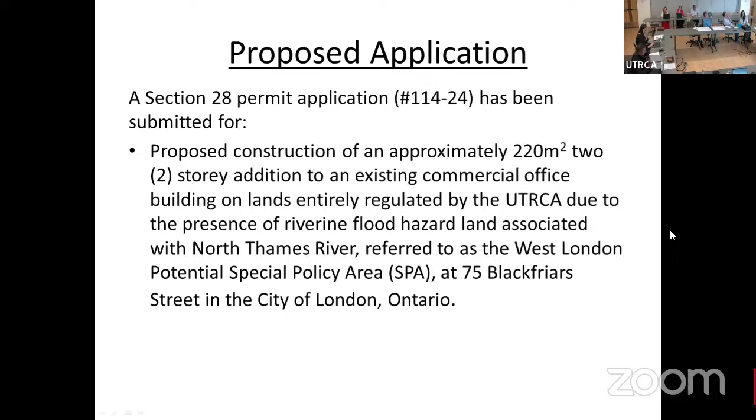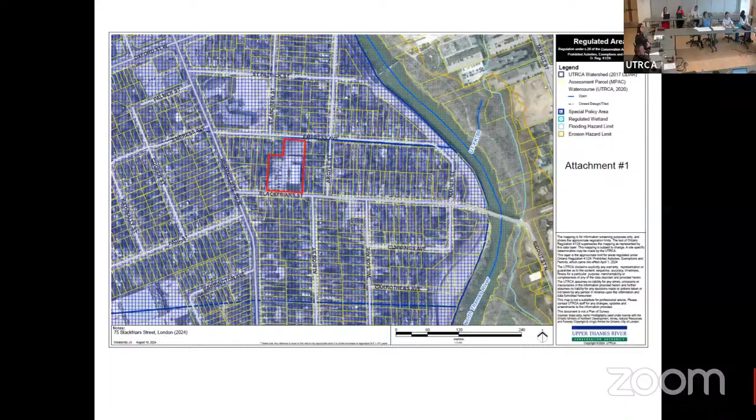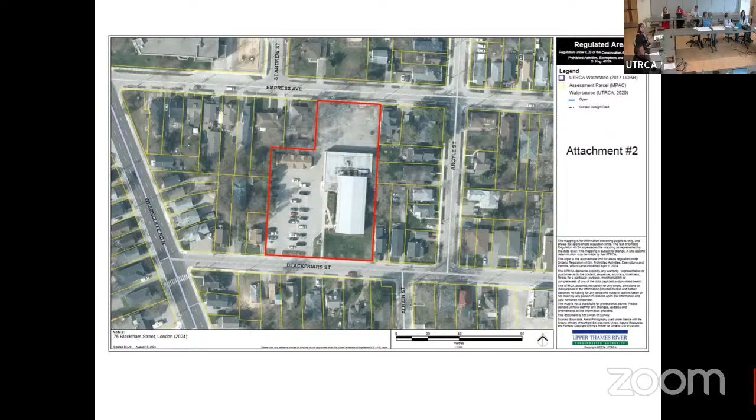So here's without our regulated areas on the site. The previous one showed in hatching that it's completely regulated. That whole area is in the West London Potential Special Policy Area. So on this one, you can see the site. You can see there's a large commercial building and then an accessory structure and parking. Yeah, so just an overview of what the site looks like. Next slide. So some background.

So here are some sections of the UTRCA Environmental Planning Policy Manual that speak to special policy areas. So section 2.2.7.1.2.3, special policy areas are specifically identified areas that are not protected to the minimum provincial standard. The area must be a viable community that feasibly cannot be protected from the risk of flooding. Through the implementation of a special policy area, the provincial government may permit certain activities that do not meet the minimum provincial standards. Special policy areas must be supported by the municipality and the conservation authority and must be approved by the ministries of Natural Resources and Municipal Affairs and Housing.

So some specific policies to consider for this are no basements, flood proofing to maximum, no new severances, no lots, no intensification of use, preference for residential conversion to commercial type uses, no daycares, hospitals, nursing homes, etc. Next slide.

Okay, so section 2.2.7.1.1.3.3, special policy areas. So in those limited cases where a special policy area is applicable, the limits of the special policy area and policies must be supported by the UTRCA and must be approved by the municipality, the Ministry of Natural Resources, and the Ministry of Municipal Affairs and Housing. In cooperation with the municipality, the UTRCA may identify potential special policy areas and implement interim policy requirements for these areas while the formal special policy area review and approval process is underway. So this is this area.

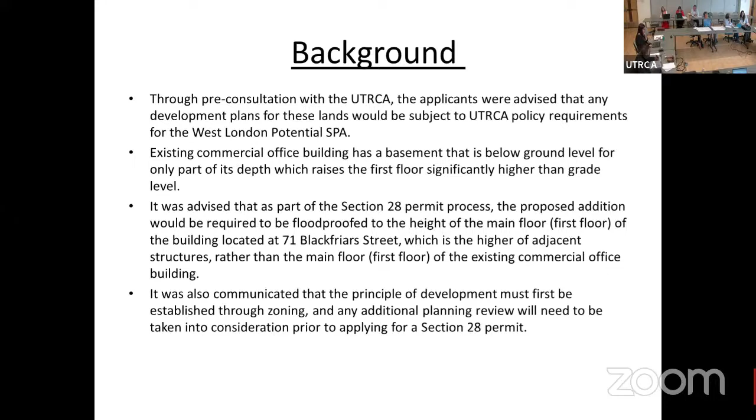So the UTRCA has provided comments already regarding development requirements for the subject lands through site plan consultation SPC 22-152, a minor variance application A.007-23, site plan application SPC 23-088, as well as most recently a site plan consultation SPC 22-152. So comments were as follows in those planning comments.

So the first one, bolded, is the most important, which indicates that policies for the SPA require that floodproofing measures to regulatory flood elevation will be required if feasible. And so noting that the regulatory flood elevation is significantly higher than the first floor. So this is all flood hazard. Without the dike system, it would be over a meter of flood depth.

So ideally, we would want it to be flood-proof to the regulatory, if that's feasible, or at minimum to the height of the main floor, first floor of the existing structure, or the main first floor of the higher of adjacent structures. Based on previous correspondence between the applicant and UTRCA staff, the finished floor elevation for the proposed addition will need to meet or exceed the height of the main floor, first floor of 71 Blackfriars Street. So we ask that be clearly identified.

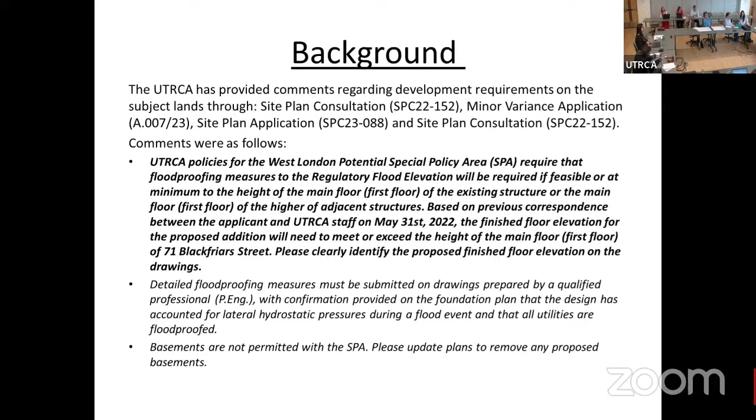And then we additionally require detailed floodproofing measures, as well as no basements are permitted. And because they were proposing it to be lower than that elevation of 71 Blackfriars Street, it was deemed to be a basement. Okay, next slide.

So the proposal: on May 13th, 2024, UTRCA, so myself, received an application from Zelinka Priamo Limited, Dave Hannam, on behalf of Southside Construction Management Limited, Vito Frijia, for the proposed development. Construction of a two-story, 220 square meter addition at the front of the existing office building. The two-story addition will allow for the facilitation of an expanded office space consisting of a new reception area, lobby, staff offices, and boardroom, and also for barrier-free access to be provided throughout.

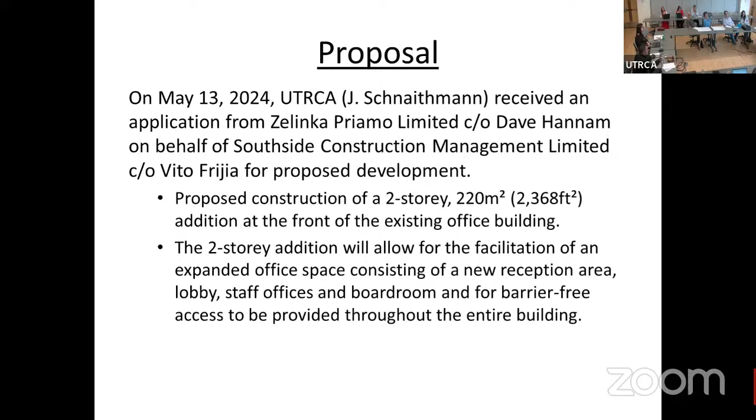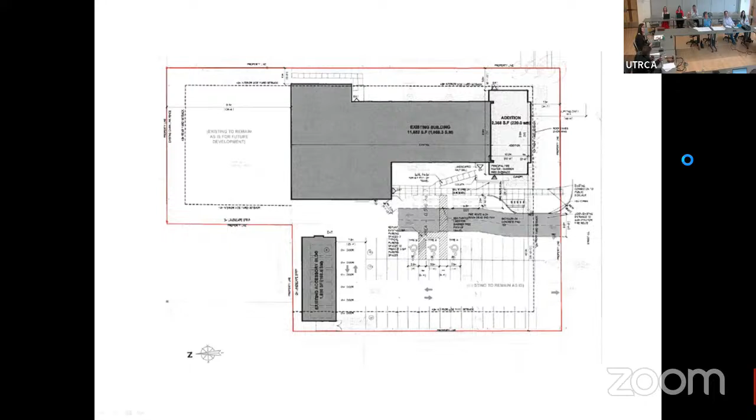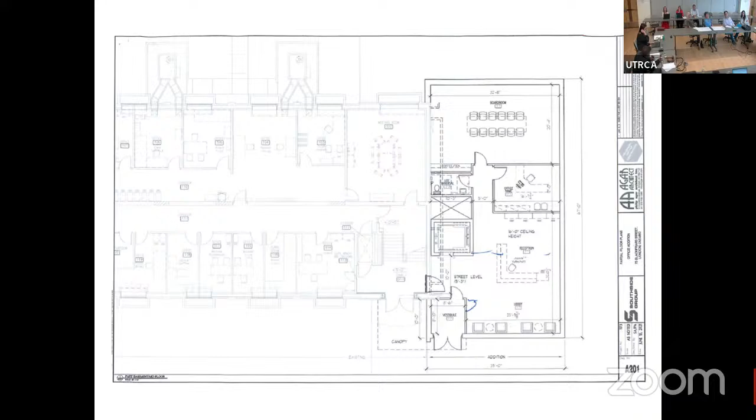Yeah, it's really hard to see on these. I wish I could have highlighted this during the package. But with this one, you get a closer look.

Okay, so this is the ground floor plan. So this would be the first floor of the addition, right over here. And then you can see that when you go through this existing doorway, there's stairs that take you downstairs to the meeting room. And then there's stairs that go upstairs.

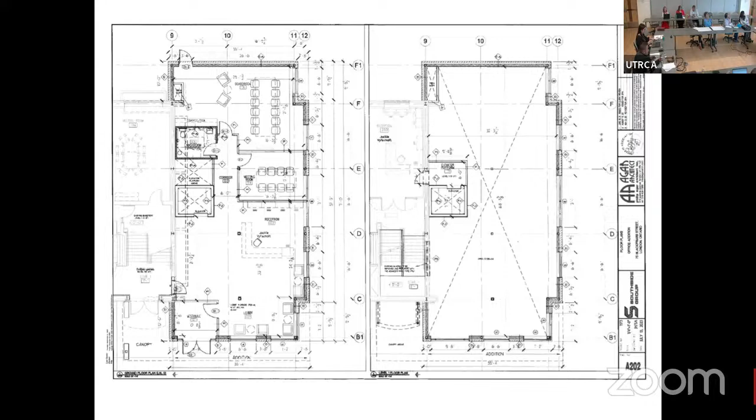And so this one shows the open space. So I'm assuming, and the applicant's presentation will probably explain this more, that it's a vaulted ceiling. So you can see here, this is the existing first floor of the structure with the reception area. Okay, next slide. Pardon? Yes, that's the proposed structure.

And then this is from the submission from the applicant. So just showing that they had elevations taken. And so from their elevation survey, assuming that the entrance for the existing structure is, I think it's in the presentation as well, 0. So you can just see kind of an idea of different elevations.

So most of the surrounding houses, so it's mainly residential, are a lower first floor elevation, and the one at 71 Blackfriars, which is directly east, would be approximately 13 inches higher than the existing entrance door. So 13 inches, so just over a foot. Okay, right? Okay, next slide.

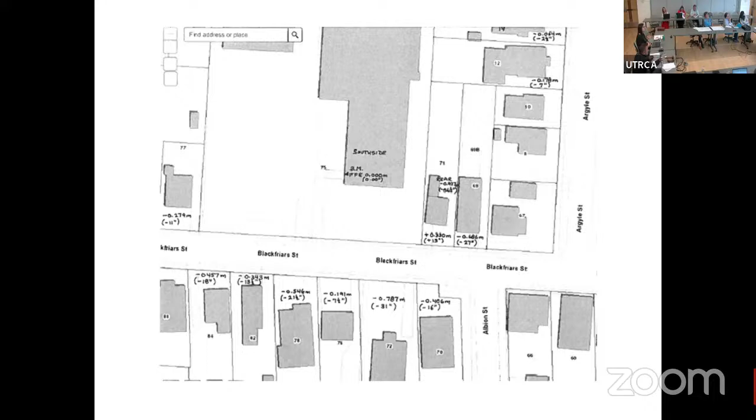Yeah, I think there'll be a lot of duplication of information. It'll be pretty quick. So discussion analysis, so the application has been evaluated for conformity with general flood hazard policies contained within section 4 of the UTRCA planning and policy manual. Next slide.

Okay, so applicable policy. So development, the construction, reconstruction, erecting or placing of a building or structure of any kind. So this is development. I don't think I need to go through the rest of the ones. Next slide.

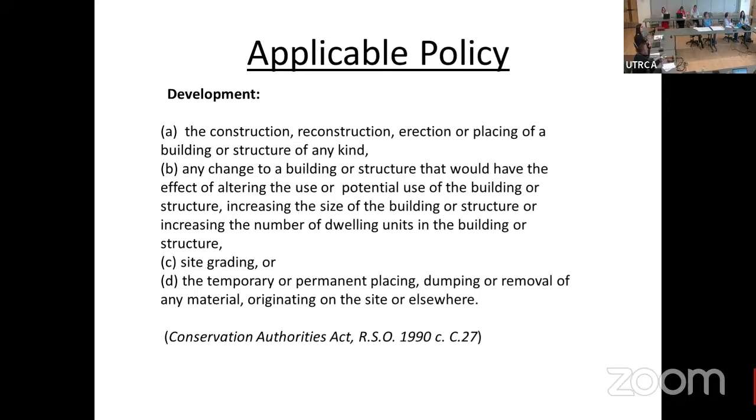Section 28(1) of the Conservation Authorities Act states that no person shall carry on or permit another person to carry on development activities in areas that are within the authority's area of jurisdiction and are river or stream valleys. So subject to subsection 28.1.1, the authority may issue a permit to a person to engage in activities specified in the permit that would otherwise be prohibited by section 28.

In the opinion of the authority, the activity is not likely to affect the control of flooding, erosion, dynamic beaches, or unstable soil or ground. And then the activity is not likely to create conditions or circumstances that, in the event of a natural hazard, might jeopardize the health or safety of persons or result in the damage or destruction of property. Next slide.

So here's our general flood hazard policies. So section 4 of the UTRCA planning and policy manual contains the following policies for special policy areas. So 1.2.2 under the riverine flooding hazard policies, special policy areas. So development within approved special policy areas shall be consistent with the approved policies. So we do have approved special policy areas in the city of London, but for potential special policy areas, such as West London and Ada Street in the city of London, the following interim policies apply.

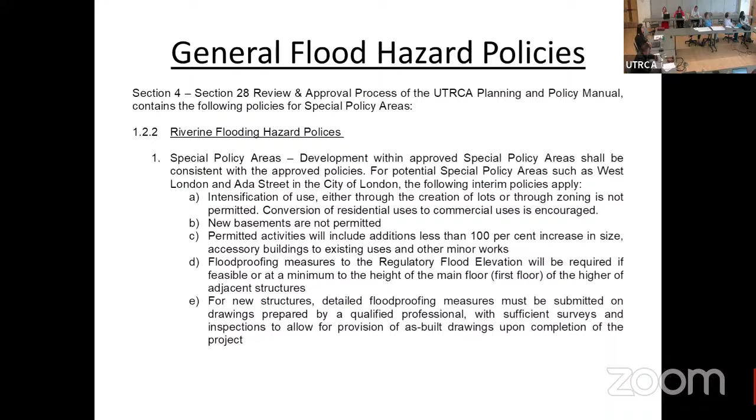We can go back to the previous slide. So B, new basements, D, floodproofing to the main floor, first floor elevation of the higher adjacent structures, and then again, we don't have the detailed floodproofing. However, right now it's mainly D. Okay, next slide. Sure. Oh, sorry, we'll be able to clarify that one. Okay, so therefore, previous slide.

Therefore, the proposed development does not meet all of the standard review criteria for staff to issue the necessary section 28. So, should this application be approved by the hearing committee, the requirement for final reports and drawings prepared through the municipal site plan process and to the satisfaction of the UTRCA would be appropriate. Should include the detailed flood... Next slide.

In conclusion, the proposal is non-conforming because it does not meet all UTRCA interim policy requirements for the West London Commercial Special Policy Area and general staff review criteria for similar projects. The proposal is contrary to policy and therefore staff must recommend refusal of application 114.24. And the applicant has advised that they wish to proceed with the hearing. Next slide. And that's the end of the presentation. So, yeah.

I'll call upon the applicant and their agent, who will now speak and make any comments on the staff report, please.

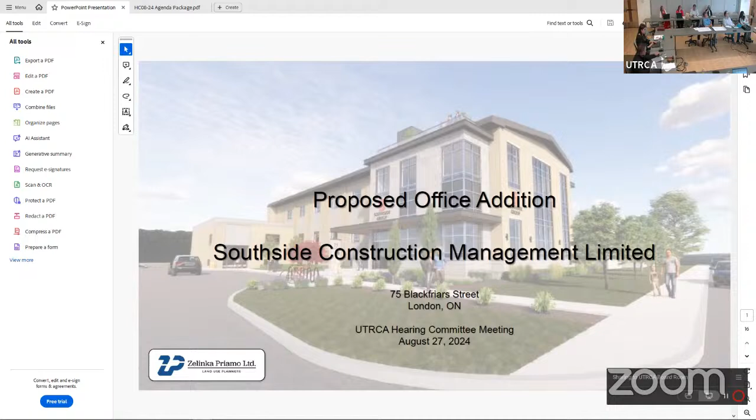Just go to the next slide. It's going to be one that I think we've done. So I'm going to do most of the talking in terms of the presentation. We have subject matter experts here available to answer any questions at the end if needed. Apologies in advance if there is some repetition with respect to Jessica's presentation as well. We've dug into some of these issues that staff have, obviously. But if we just want to go through to the next slide.

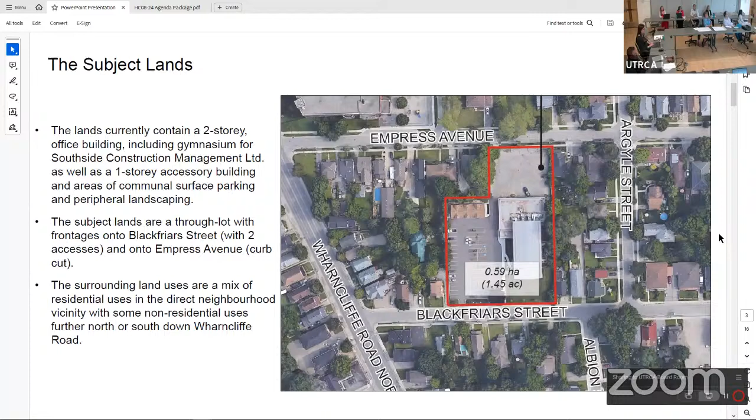So I've just given a quick synopsis in terms of this is an aerial photograph of the subject lands. As indicated, currently developed for a two-story office building, including a gymnasium and a one-story accessory building with various surface parking and landscaping. The site has frontage on Blackfriars and then it has frontage onto Empress. Surrounding land uses are a mix of residential uses and a variety of built forms within the district. Next slide.

So in later slides, I provide some graphics with a copy of the site plan and some renderings that we've prepared. But just in summary, the proposed development consists of the construction of a two-story addition on the undeveloped grass area in front of the existing office. The primary purpose of the proposed addition is to provide a building entrance and reception area at grade to make the entire building handicap accessible. The new elevator that's proposed would provide access up to the upper floors of the building as well, which is currently only accessed by stairs.

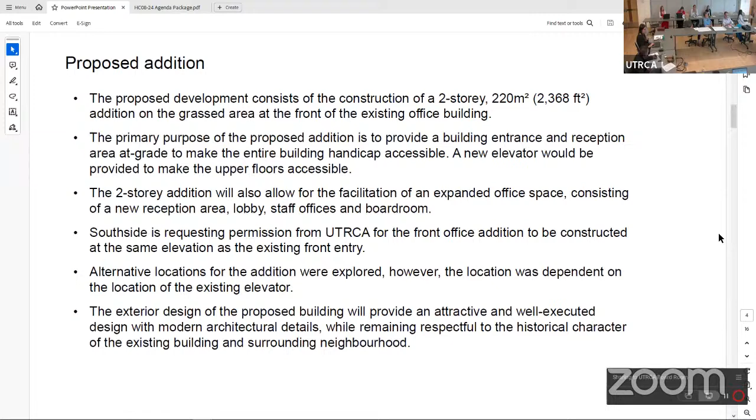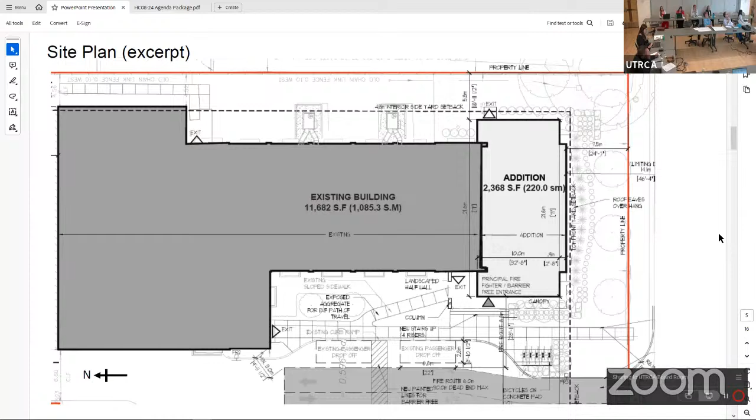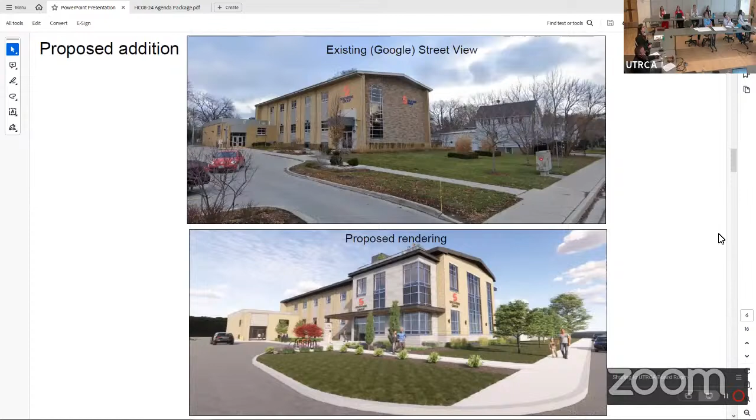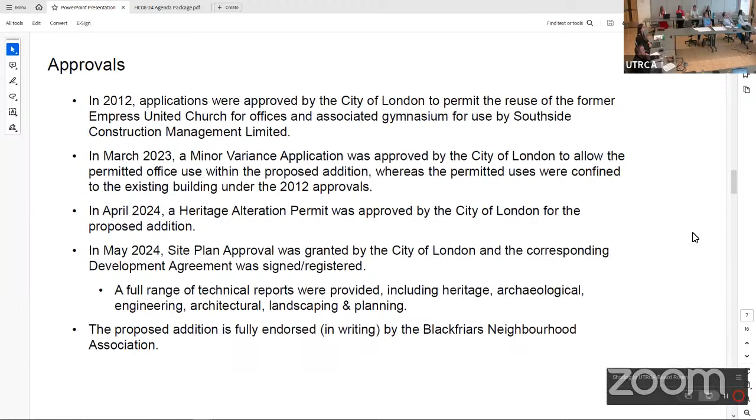Because this is a listed building, we had to get a heritage alteration permit approved by the city. We've also gone through site plan approval through that application and the others as well. There's been a range of technical reports, fully vetted, including heritage, archaeological, engineering, landscape planning, etc. Also, in addition to that, there has been a full endorsement in writing for the proposed addition from Blackfriars Neighbourhood Association. Next slide, please. As indicated in Jessica's presentation, these are the staff conclusions. The bolded words I've added in bold.

I think it's important to acknowledge at this point in time that with regards to the Section 28 application, we understand staff's hands are somewhat tied with respect to recommending approval, given that all the applicable standard review criteria haven't been met. I think it's important here to note the staff report concludes that the application meets most of the flood hazard policies. However, because not all, and we'll get into that a little bit later, all of the policy requirements of the special policy area are met, they must recommend refusal.

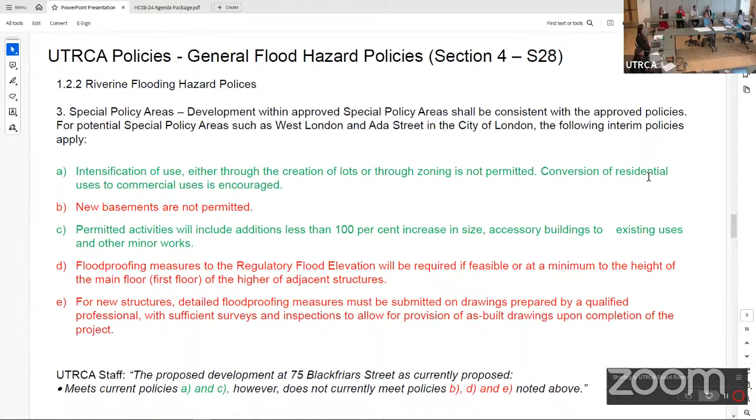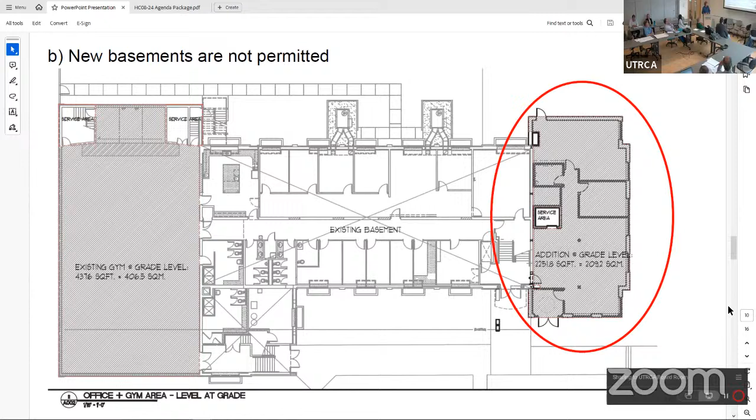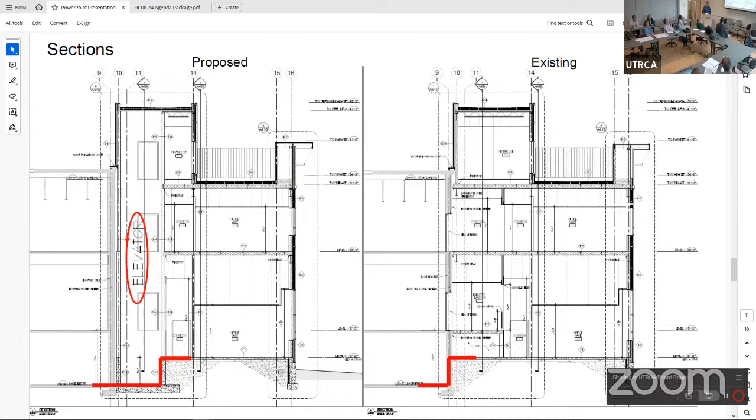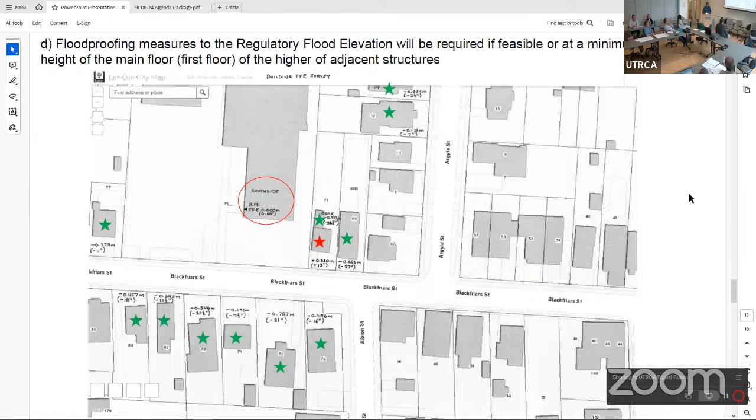Further, I'd add that the civil materials that development engineering prepared through the development applications confirm that the post-development flows will match pre-development flows, and with the inclusion of the swale running along that easterly property line, it's our team's opinion the potential for flooding, which, by the way, according to the applicants, has never been experienced on the site, would be improved. Next slide.

As such, we're asking for the committee to take into consideration the unusual physical context of the front portion of this adjacent building and consider the merits and obvious benefits associated with the proposed Southside addition. Next slide, please.

So just circling back to subsection E. Co-elevate was retained by Southside to provide structural engineering consulting services for the proposed addition. Once again, we have emphasised no basement in the traditional part of that addition. Co-elevate confirmed in the letter attached to the agenda package that they will be designing the structural elements of the proposed addition to resist all imposed loads with regards to hydrostatic pressure as indicated in the building code.

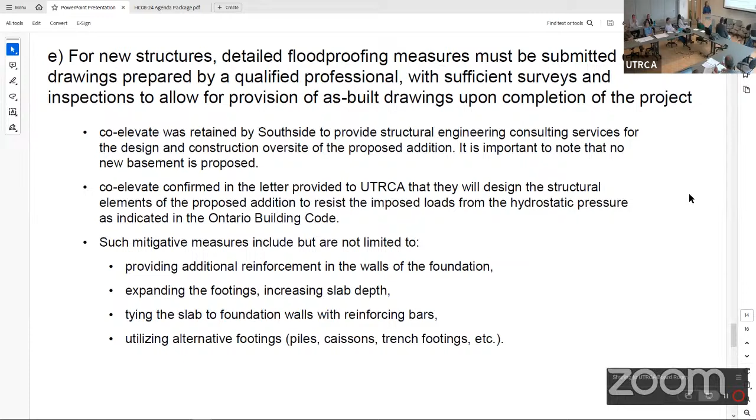Just a few concluding remarks. As indicated, an extensive range of supporting technical materials has been prepared, reviewed and approved for this proposed addition. The project has been fully endorsed by the local neighbourhood association. As outlined in this presentation and in our team's materials, it's our opinion that the project meets the general intent of the UTRCA and special policies, which seek to control flooding.

It's our opinion that with the design elements and measures proposed, the conditions and circumstances in the event of a natural hazard would actually be improved. As I mentioned a number of times, the primary focus of this application is to provide handicap accessibility to the entire building. Having a base at all levels on number 71 and this front of number 71 would defeat the purpose of trying to provide full accessibility.

As such, we ask the committee to allow Southside to construct the proposed addition at the same elevation as the existing. It's our understanding that under section 28.1 of the Conservation Authorities Act, this hearing committee has the authorization in circumstances such as this to issue a permit for the proposed addition. As I indicated, if approval is made, Southside would be agreeable. That concludes my presentation. Our team is available to answer any questions.

Thank you very much. Is there anything else that either the applicant or staff would like to ask or clarify? And then I will now turn it over to the hearings committee.

I'd like to give you a little bit of history of this property. About 10, 11 years ago, the property used to be a church known as the Empress United Church. That congregation merged with another congregation. The building needed a lot of work, a new system, new plumbing, new windows, and so forth. And it did have a lift to go from the lower level to the main floor. The main level of the church used to have a soup kitchen and offices, while the lower level is exactly 6 feet low.

Our building is also a raised ranch, the term used by David. So we basically have an area that's 10 by 12 feet. You walk in, and then you have the choice to go upstairs to the main floor or downstairs to the lower level. I'm sorry if I don't reach everything.

We bought the property, we did some renovation, we had to go through a rezoning process, and the city supported us. At the time of the rezoning, we did major construction. The height of the church was almost 32 feet on the main floor. We didn't need 32 feet, so we added a third floor, and we paid development fees.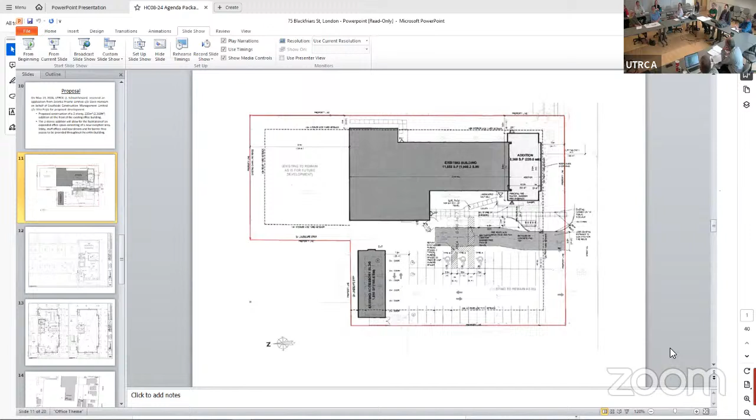The next question to the applicant: besides an elevator shaft, is there any foundation below, or is everything above grade at the current level of the entrance? Nothing more besides the elevator shaft, and the elevator shaft you have to have. The current building right now has the basement, and you can see in the pictures the windows into that basement. And the entrance to the current building is obviously above those windows right now.

No, actually, the entrance is halfway in, isn't it? So the sill height of the window is lower than our entrance. The current policy applies only to the flood-proofing of the addition, not. So.

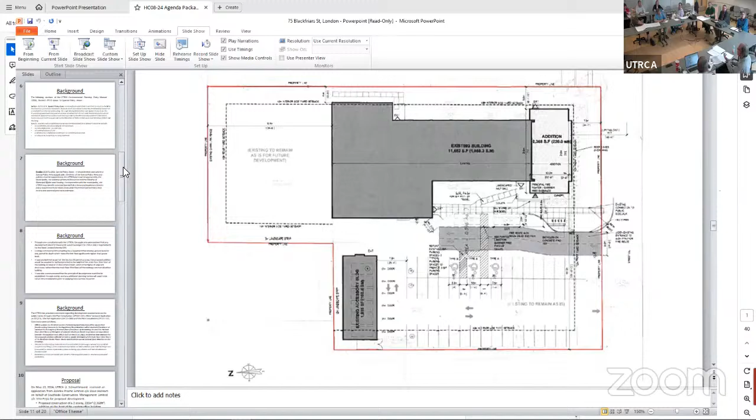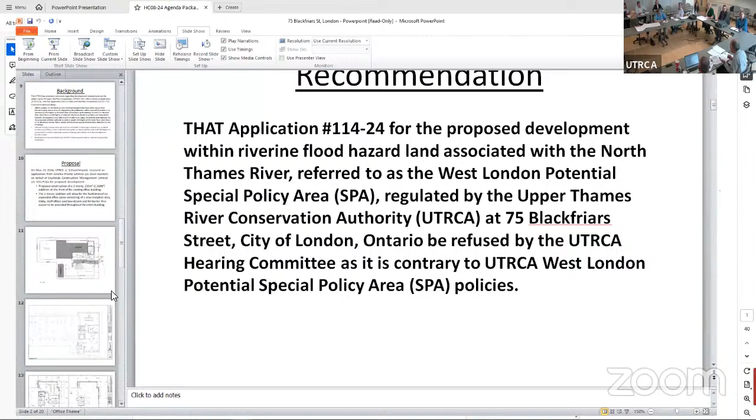Through the chair, do you think we could get that up on the screen just so we can see it? There's some understanding that there would be no basements, which there won't be any. And the key issue, as I understand, is condition D and E. Is there anything else other than D and E? There would need to be an investigation to give them the section.

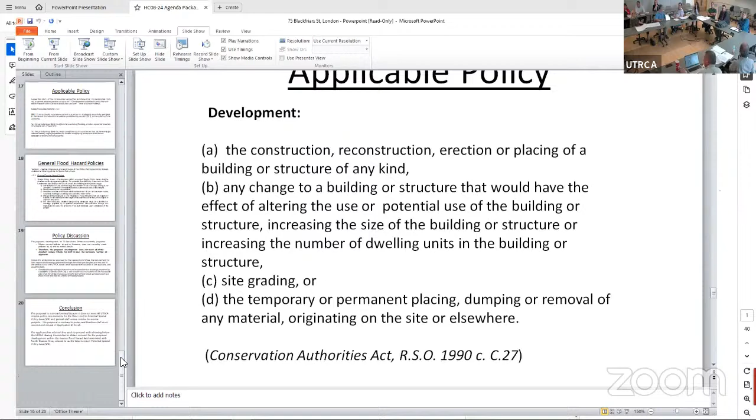Just to clarify, the committee will decide on the vote to give consent. So, to staff. Yeah, so that last piece is what's noted. So near as I can tell, that's the only condition that staff have suggested. Thank you.